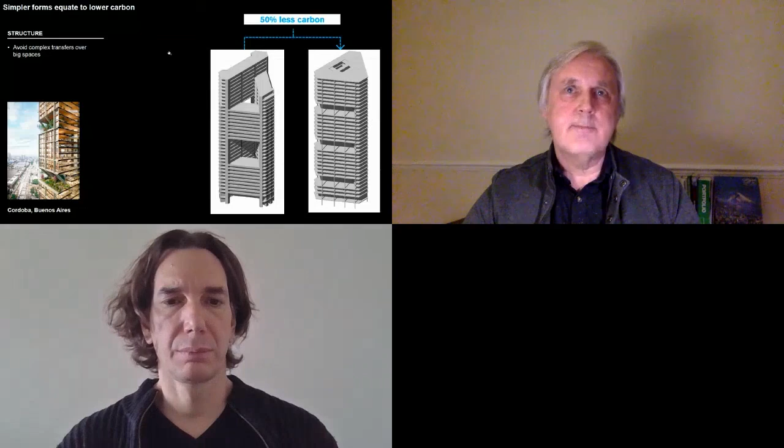And we looked very carefully also at all of the shading systems associated with the building, because we have found it's normally very good to have shading on a building to reduce the energy. But if the shading is too heavy, you can actually put back more carbon over the lifetime of a building than you can take away. So you have to make sure you do it properly. And Juan will talk about that in a minute.

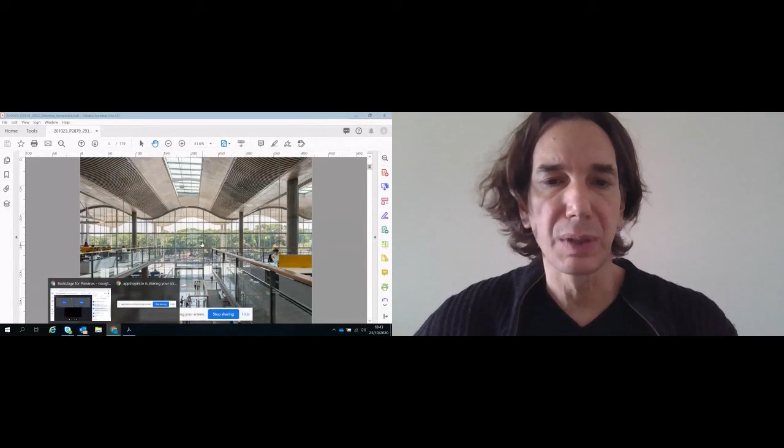This is the Avenida 9 de Julio, the center of our city. And this is the third project we do in the city. The first one, the Aleph, is a residential project. The second, City Hall, which is here shown on the screen, is one of the first civic buildings which we certified LEED Gold in Buenos Aires, and which was preceded by the Aleph, a residential building, which of course had many sustainable themes as well for housing, as shading the facade and adapting the buildings to climate.

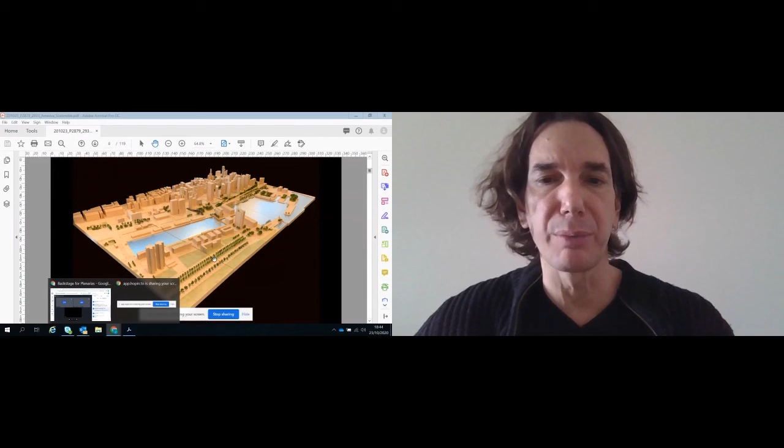What's very particular about this new project, which is a commercial office building, is it's located at the edge of the city, right on the waterfront. So it has fantastic views. And just to show you a bit of how we work, this is a model we made in our model shop of a large area of the city to study the massing of the building and how to best build a large tower onto this site.

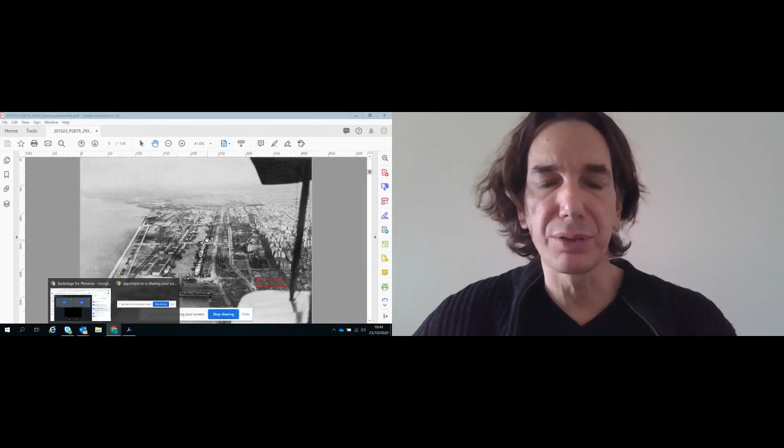It's a historic site. There you see at the center of the image, Puerto Madero, the Costanera Sur as well, which was a public area back in the 30s, and our site there in the red box, in a very historic fabric. And it's very central, as I was saying. It's very well served by public transport, and it's a very prominent location. So we thought it was a very special area to develop the building carefully.

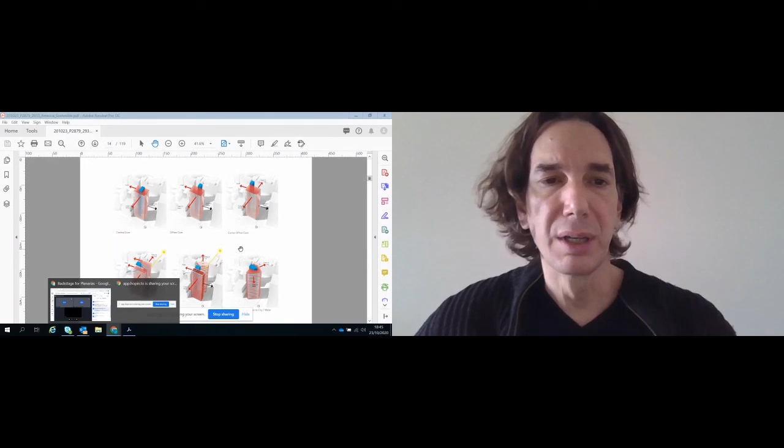So we gave a lot of thought on how to develop the massing. Usually we work with many iterations of building. So we started looking at a central core tower, then pushing the core towards the back to create more views, shifting it, opening up the floor plate and looking for the right massing.

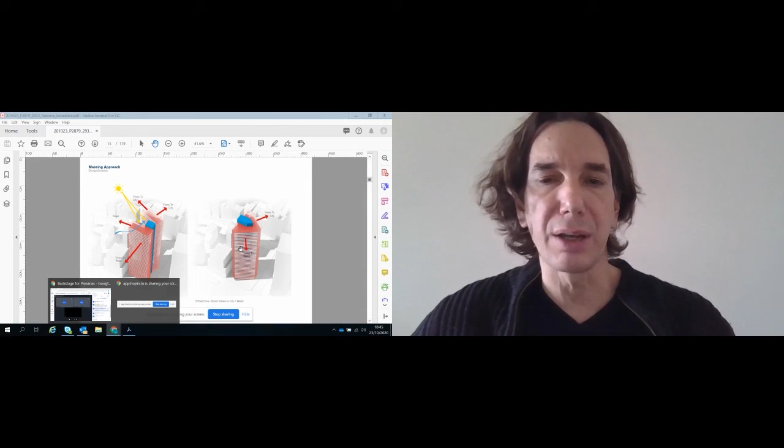And then we realized that because we have such a large bulky neighbor towards our north, we can use that neighbor to shape part of the building, but if we shape the building in a triangular form, we could get the best of the performance of the building and the views. This again is working with our team in London.

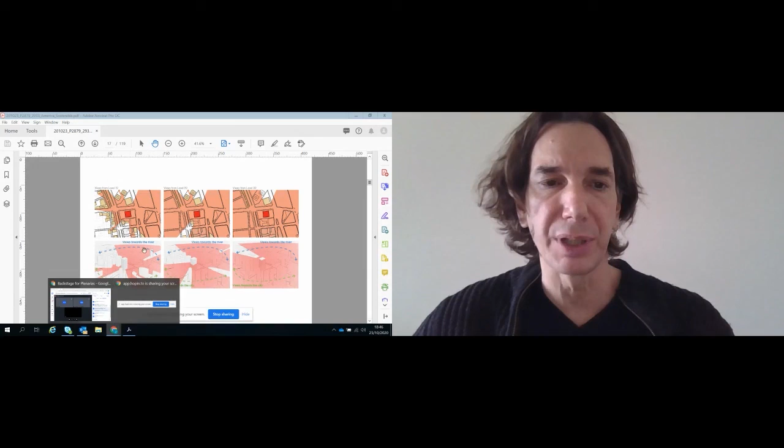We like working with very large models, all sorts of models, and all sorts of tools to understand better how the building and the shape performs. And from this view study is what created basically the shape, thinking of views as a fluid and actually flooding the site with views and seeing where the view wanted to go. So in these diagrams, you see that the shape of the building will generally follow the pink splash of views.

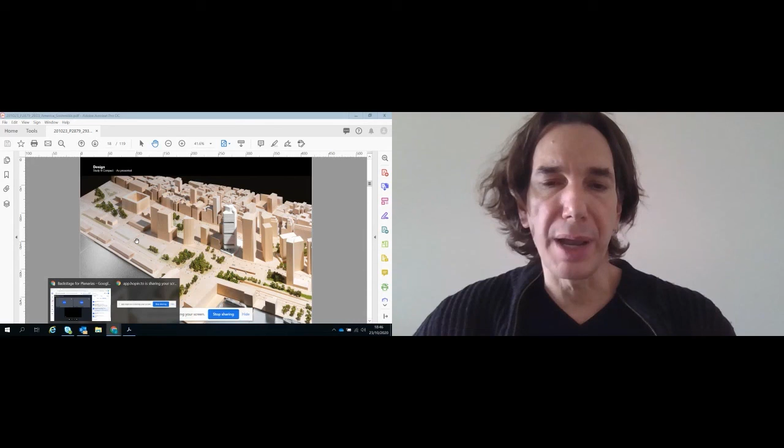And then in the model I showed you before, the form of the building, how it settles in, how the triangular shape maximizes the long view corridors towards the water and towards the city at the back. And from Puerto Madero, the Córdoba Avenue is almost on the axis of our site. So this gave us a very prominent tower.

One of the very fortunate things we were able to do is that we were granted an incentive by the city that if we freed up 70% of the land and created it as public land, we could get a higher tower. So we found the opportunity to make a fantastic urban garden and celebrate as well some of the aspects of the city. Buenos Aires is a very social city, lots of nightlife, lots of passion for tango, and lots of social interaction, which is limited a bit now by the COVID, but which we hope to recover very soon.

And to create this amazing lush garden: most of the civic piazzas that we've inherited from modernism are very dry landscapes. And on the contrary to that, what we wanted was to create a jungle, a very dense forest, to harbor what Chris was discussing before of actually sequestering and absorbing part of the carbon with a very dense canopy of trees and lawn areas, and to even raise the building above the ground so that the landscape could continue below the building.

And to have all this collection of our native species of Buenos Aires, the jacaranda tree, which is a beautiful tree, which is about to blossom now in November with its lilac flowers, the ceibo, which has pink flowers, and palm trees, which grow also very naturally in Buenos Aires, to create a very dense, lush forest, and a fantastic experience that as you approach the building, you actually walk through this very beautiful jungle.

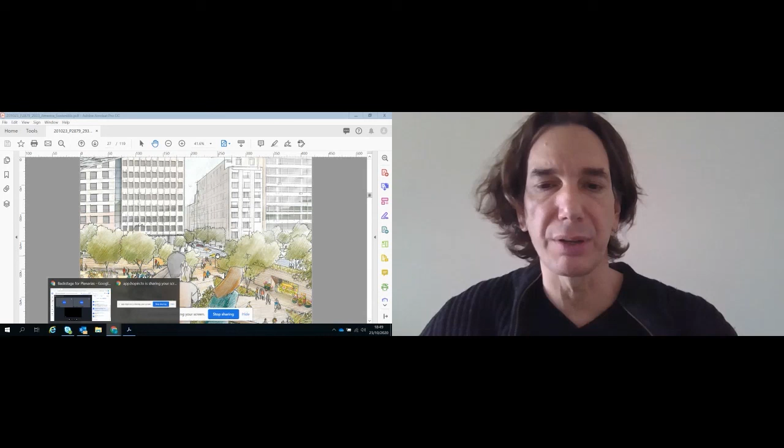And then the idea that you would go up through these escalators in the forest and continue your gardens up through the tower. So as you arrive to your lobby, instead of having the lobby on the ground floor, you actually come through escalators, through a promenade of steps and gardens to this elevated lobby, from which you can look back to the city and the gardens, and find spaces to be social, to have a coffee in the morning before you work, and create a very relaxed, contemporary workplace that would also blur the boundaries of the domestic and the corporate.

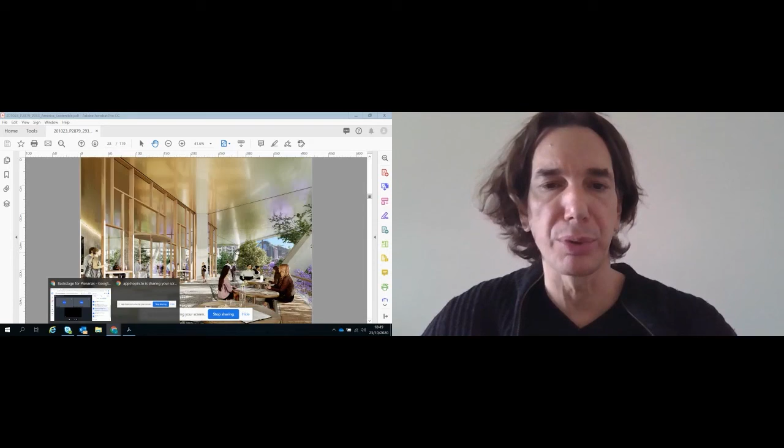This is the lobby. It's quite compact, but with the extension of the terraces and having linear gardens on the terraces that also have vegetation that cascades over the edge of the building, and developing this very natural palette of materials with wood, with leather, with paving stones, and with reinforced expressed concrete to create a very biophilic building which celebrates nature.

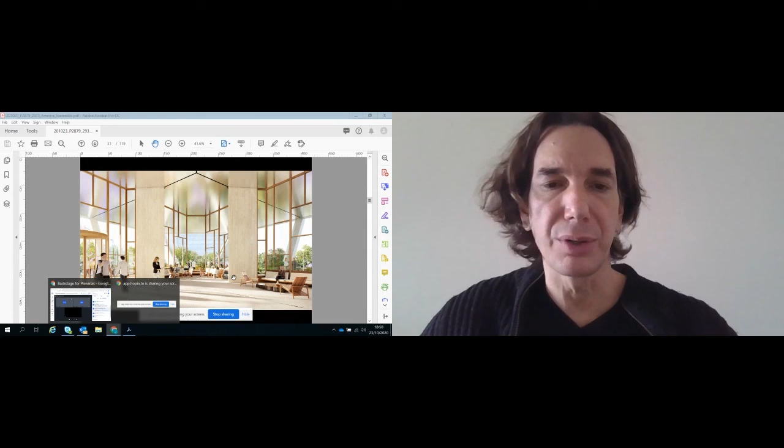This is the view from the lobby looking out, and the idea is that you're surrounded in an oasis of green, and all the noise that you have from the city, which is quite noisy, gets buffered as well to create this very unique, elegant, and fantastic experience for the building.

As we go up the section, another of the ideas was that we wanted to really have social spaces, and instead of having single small floor plates, creating these large atriums which go up the building, and a series of villages, in which we could also introduce nature within these courtyards. So we have 5 of these villages around the building, which is unprecedented for a commercial building.

And there, we have to congratulate our clients, who were also very forward thinking and accompanied us in this journey of creating one of the most forward-thinking office buildings, not only in Argentina, but we think in the world.

And as we developed this idea of having the green and terraces go up through the building so that we could green the whole building, then we found a lot of structural challenges on how to make the most efficient structure. So these are a number of different structural studies, how we could balance the amount of material and the structural performance to create these gardens.

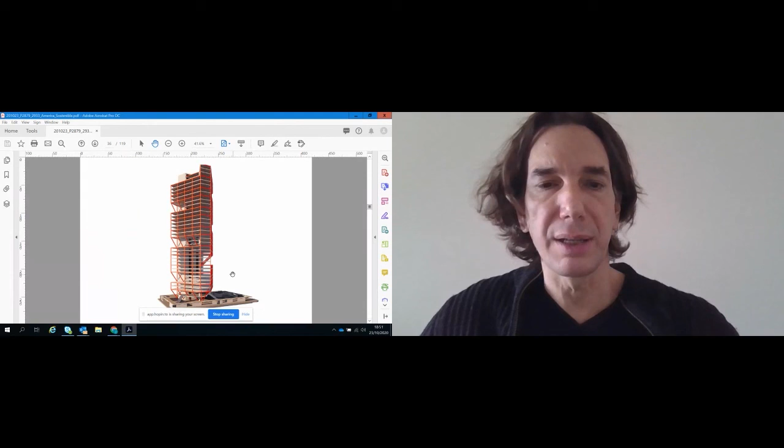And after a number of studies of the weight of the building and the structure, we found this solution, which with inclined concrete struts, we could create these very large openings in garden, but still have a very efficient structure to create these amazing gardens.

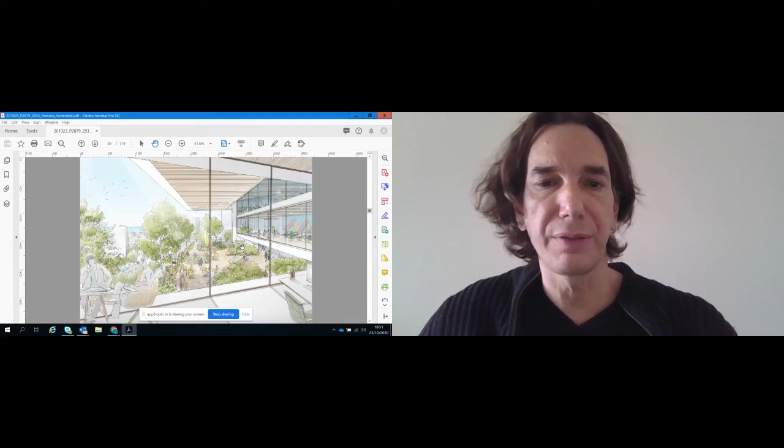So these are spaces which we conceive as not only spaces to work, but spaces to socialize. This is sort of our holistic view of how you see the workplace, which goes into the well-being and the philosophy of the WELL certification, that as you're working, you're surrounded by gardens on many of the levels of the building. And then these spaces are designed not only for work, for meetings, for relaxation, but also to have yoga classes, to have forums, to have teachings.

So this outdoor space becomes more important even than the indoor space. And here is one of our early images of how you would feel within this canopy of trees. We did also a number of wind tunnel studies, which were conducted in Australia, to verify that we had acceptable levels of comfort on the wind, because Buenos Aires is quite a windy city as you go up.

And then to have this image of the building where you have the gardens cascading down on each side of the triangular face of the building. So some of them face the city, some of them face the river, and as we segment the building, we also start integrating it with the different heights of the fabric of Buenos Aires.

These studies, as Chris was mentioning before, we were very conscious. Buenos Aires can get very hot. The sun is very aggressive, particularly in the west and in the summer. So we started with a baseline scenario: if we had 70% glass, what the operational carbon of the building would be. And then we started doing a number of iterations. Well, what happens when you start shading the glass? And of course, you reduce your operational carbon.

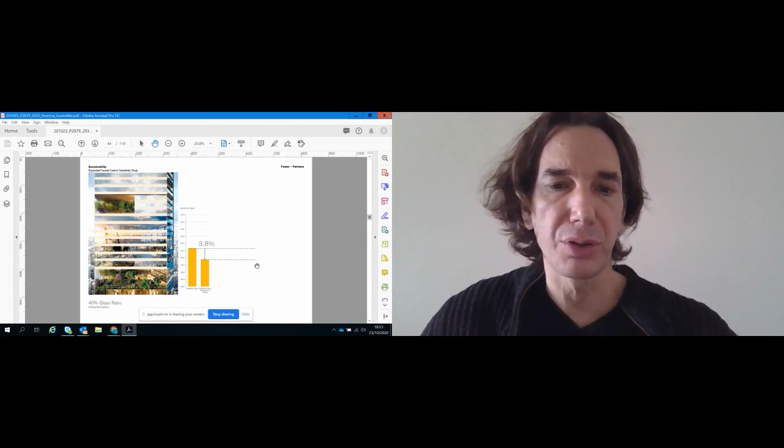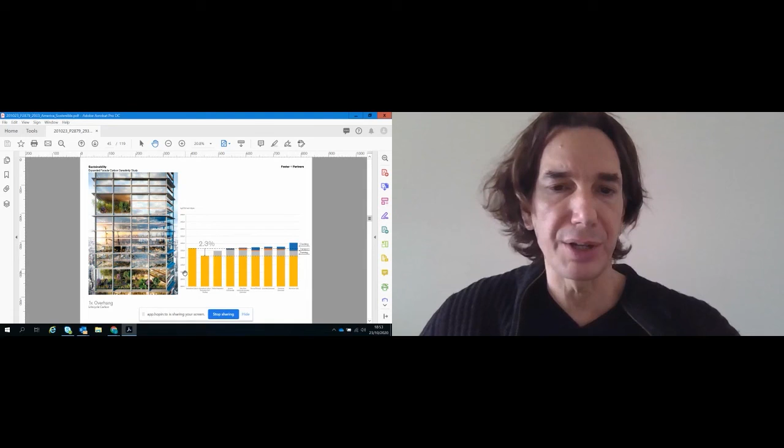And as you start adding different shading systems and different materials, if we did them in timber, if we did them in ceramics and glass, trying to find which of the materials actually would be the most efficient in terms of reducing this carbon liberation into the atmosphere. So we did a number of these, and as we did this, of course, we learned, as Chris mentioned, that we had to balance adding cladding material, adding aluminium, adding other materials, which helped us to reduce the sun on the facade, but added more in terms of materials and more weight onto the building.

So after doing a number of these studies, we learned that we had to find sort of an optimum balance between the amount of glass and the amount of shading and the amount of material, which was quite an enriching process for myself and for the team. And also always bearing in mind our sensibility to the aesthetic. So even though in this option we had very much shading and we reduced 6.1% on the baseline, the amount of material that we had to add for that almost offset part of the gains that we had.

So we ended up with 3 options, 3 studies which we presented to our clients. We costed them, we reduced that to 2, and the logic of this facade, of course, was if we can get the largest piece of glass commercially available, and the rest of the facade we actually make blank pieces of facade, then we had a huge gain in terms of reducing the glazed area of the building. So our average solar radiation reduced a lot.

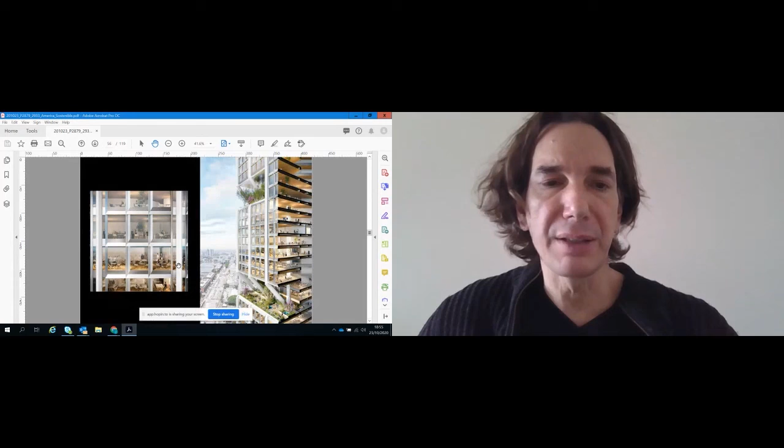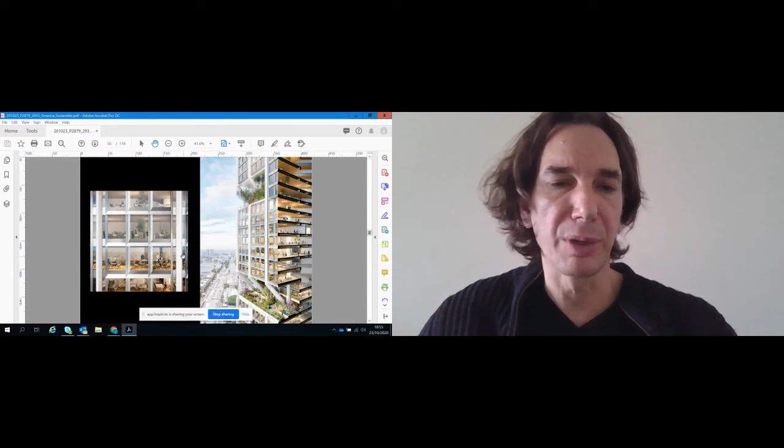So instead of having a curtain wall building, we found that, even though the views were very valuable, we could still have amazing views with less glass. And if we folded the metal to provide a lot of the shading at the high point of the sun, then we had the optimal solution in terms of carbon reduction and footprint reduction and views.

So this is the solution that we currently have, which is a picture frame, which is saying if we move away from curtain wall buildings and we look at the surroundings where traditional buildings had less glass, but still we have amazing framed views, we have huge daylight penetration, but we can reduce part of the effect of the weather by shading part of the facade.

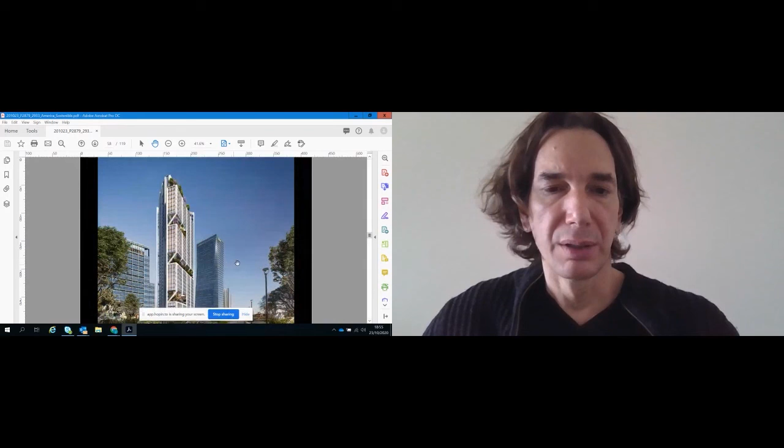I'm going to fly now to Chile, to La Fábrica. This is a project that we started about 9 months ago. It's our first project in Chile. Santiago is also a city that is evolving, in a number of development patterns on the basis of the automobile. And this is what names our project, La Fábrica, which actually is a factory. It's in a very industrial neighborhood, San Joaquin.

And this was a building built in the 1940s, which was the main manufacturer of silk and cotton in Chile. So it was a very important factory. And it has a very rich social history and political history, because at one point it was actually taken by the workers, then it was reclaimed. But there was always a vision from the owners to provide a social center. They provided housing for the workers. They provided school, nursery. So it was a very forward-thinking place.

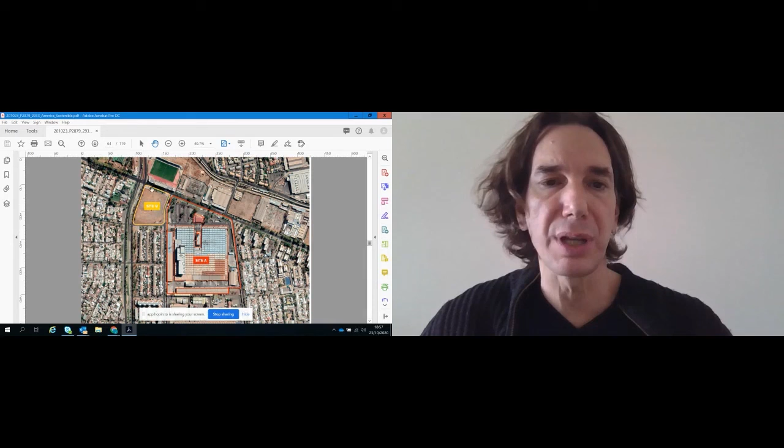And along the site, all the housing was workers' housing, in which a lot of the families of the original workers of the factory still live. So a very beautiful project in terms of the architecture, but also in terms of the social history and the social implications that it has. So our commission was to do a master plan for the site A, that's shown there in red, and to do 600 units of housing associated to the factory in the site B.

And I ask you to look here. I don't know if you can see my cursor, but towards the right and center, you see a blue swimming pool and 2 large towers. This is the pattern of development and housing that has become predominant in Santiago. And you see it here in the background of the image again, these very tall towers which reach the ground.

And one of the missions that we put onto ourselves is that we wanted to change this pattern of development. We do not want to build tall. We do not want to build far away from the ground. And we asked our client to follow us in having lower buildings, buildings which would create green spaces, and which have a more dense urbanism.

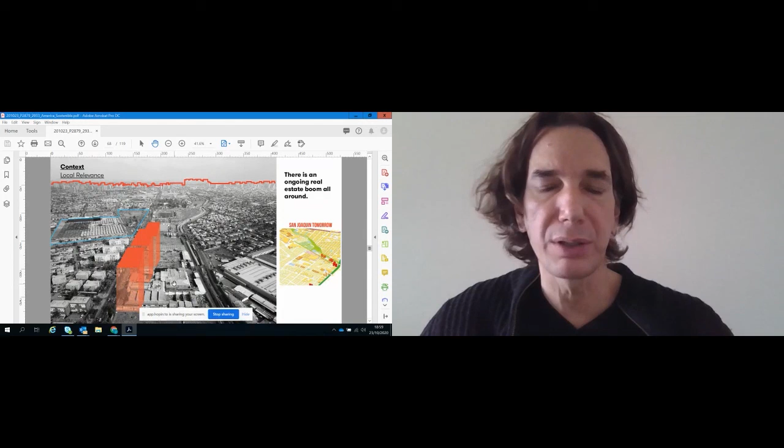This is the Fábrica now. You can see it has these large spaces surrounding it in the front, which are surface parking lots, and currently it's a retail outlet. Part of our brief was to enhance this retail. And again, from another angle, you see the future development, how the planning only considers very tall buildings with a very poor relationship to the ground.

So our first recommendation: we love the existing building. It was a very avant-garde deep plan building, 200 meters deep by 200 wide. The concrete shells, which are from the 1940s, were a very forward-thinking technology at the time. And of course, this profile was related to bringing natural daylight. So we would even say that this building was a sustainable building, even in its conception.

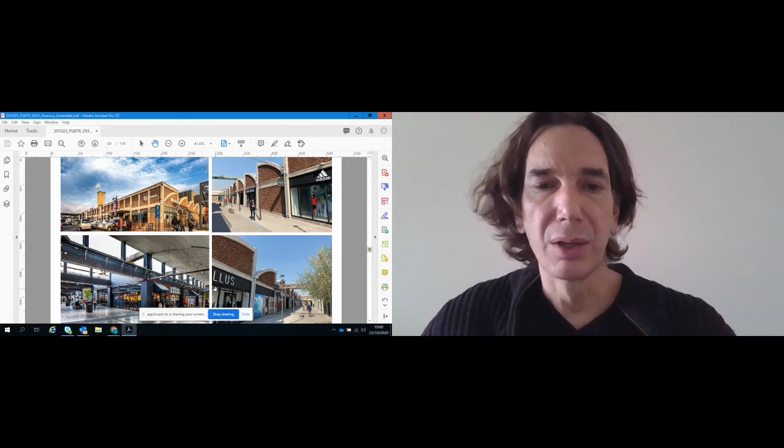So we argued very strongly that the building had to be kept, and that of course there's a value in keeping buildings. Instead of demolishing, we also save carbon by refunctionalizing and improving existing structures. Whereas in the models of development I was showing you before, the model is to demolish all of the existing and create new buildings. But again, the social fabric, keeping the memory of the buildings, keeping the livelihood of the neighborhood, avoiding gentrification. These are the workers' housing on the perimeter. It's very sensible socially.

People with their gardens, their relationships to the floor, their small commerces, which they put on the front porches. So we wanted to celebrate that, to enhance it. We wanted people to remain on the site. And how could you do an architecture that was sympathetic to this feeling, that would make people love their neighborhoods and not want to leave?

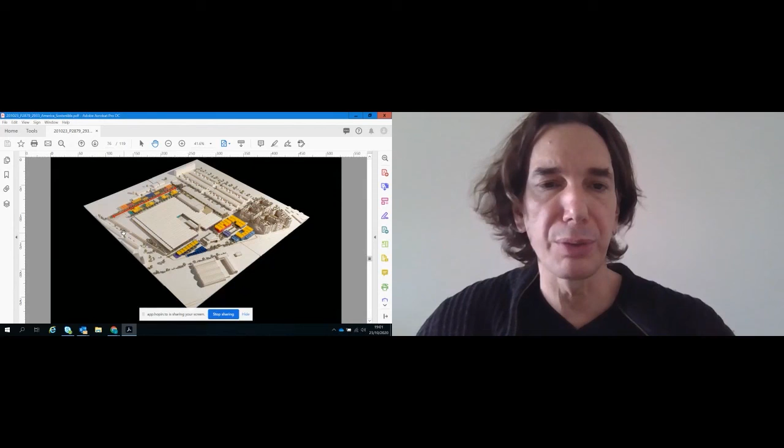So as I go now to site A, and this is how we developed the master plan, we decided to split the large block into smaller blocks, and to have low buildings in terms of six floors, to densify all of the edges of the building with housing and offices, creating a mixed-use district, creating a South Boulevard, removing only the bits of the factory which were not from the original building to create space, densifying the back to create a destination, and densifying the edges with food and beverages, retail, housing and offices.

And then to actually create access, reconnecting all of the existing neighborhood, the new housing, and the back where you would have, again, more housing. And by only removing a center of the factory, to actually create a wonderful access, keeping at the center the clock tower, which is an original clock tower, a marker that identifies the place, bringing it into the design, and then moving through to the South Boulevard,

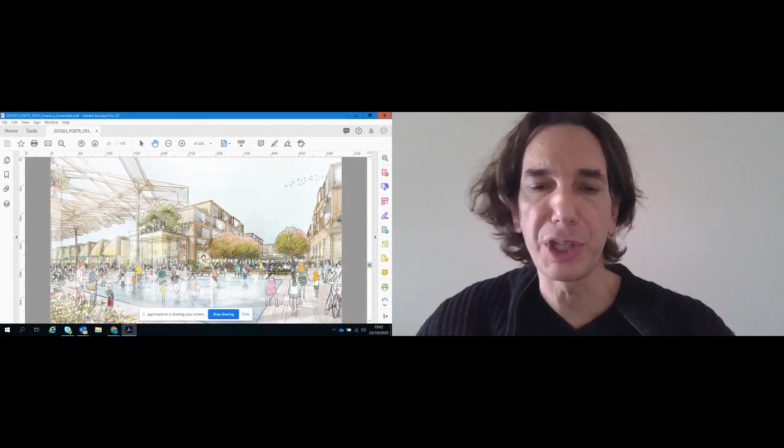where you have this very vibrant mixed-use district with residential, entertainment, and it becomes an enrichment, a destination for the new residents, but also for the existing residents, and to try to push forward this vision of a green city. I'm going to quickly pass through then site B, our ideas for the residences. This, of course, is on the drawing board, is work in progress.

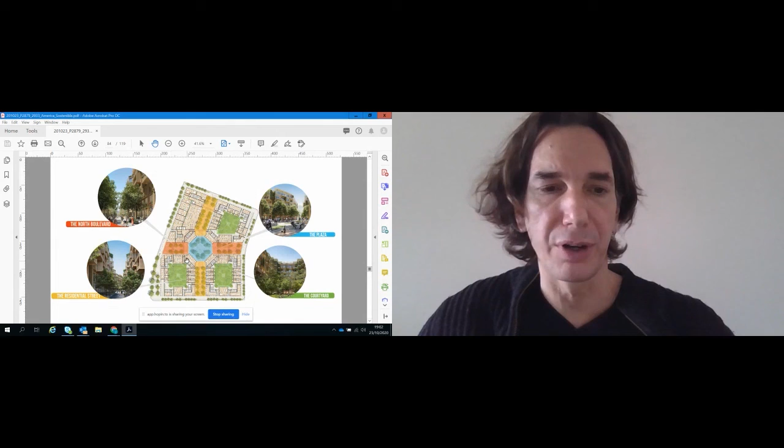And again, we conceive the city as the social spaces of the city. So we split into 4 blocks with what we call the North Boulevard with retail, the residential streets. This is our North Boulevard. We come to our central piazza, which is a very civic space. Even though it's private land, it will be offered to the public as a publicly accessible street. The development of the blocks had at the heart green courtyards again, to add more vegetation, to absorb more carbon with our trees. And these very beautiful rich courtyards, as in our previous project, we're always trying to have as much dense vegetation as we can.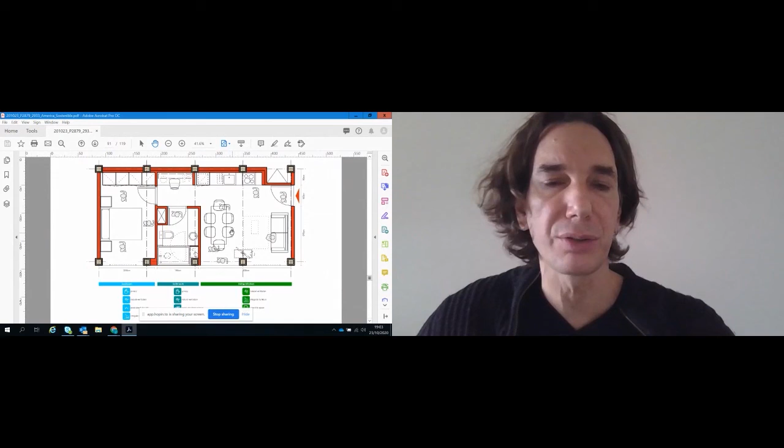The units are very small units. They're for middle class, low income families, young families, new families. So there's also a social agenda to embrace all sorts of new families, not traditional families, but a very compact space with very good quality spaces, good daylighting, and an access which resolves the service at the back and the kitchens and all the wet spaces. And then the ground floor is very important for us. We see a tapestry of small retail, only very few opportunities for big retail, to keep the livelihood of the neighborhood with small retail.

And then just to finish, we're again trying a very ambitious idea, which is to celebrate wood. Steel, we say, is the 19th century material, concrete the 20th century material. But if we can make wood the predominant material of the 21st century, wood is a storehouse for carbon. And in Chile, we saw an opportunity. 25% of Chile, especially the south, is covered with wood. Lots of it is naturally regenerated, but there are very global players in terms of the wood market. And Chile is a very forward-thinking country, a very avant-garde mentality. And we thought there's an opportunity to celebrate also a tradition in wood.

These are the churches of the south of Chile. Not only is the cladding made in wood, but the whole buildings are entirely built in wood. The floors, the furniture, the ceilings, the structure. We went and visited some of the CLT plants, and we thought, well, we have a real opportunity to make an impact in carbon by looking at a structure in wood and actually promoting a new pattern of development, but also a new pattern of construction, so that maybe we can help push forward the agenda in making mass timber buildings the mainstream of construction. We kept the buildings low for that.

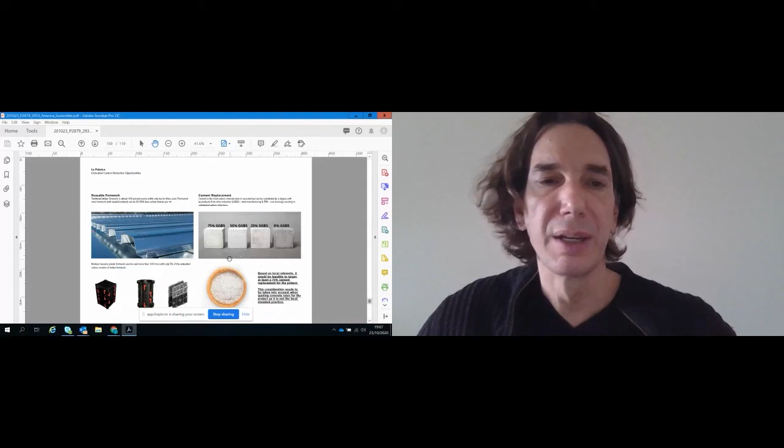And of course, looking at if we use GGBS, cement replacement, reusable formwork, basically all the tricks we can find, recycled content, low carbon sourcing by using power from solar. We analyze with Chris's teams all of these opportunities and we try to promote them.

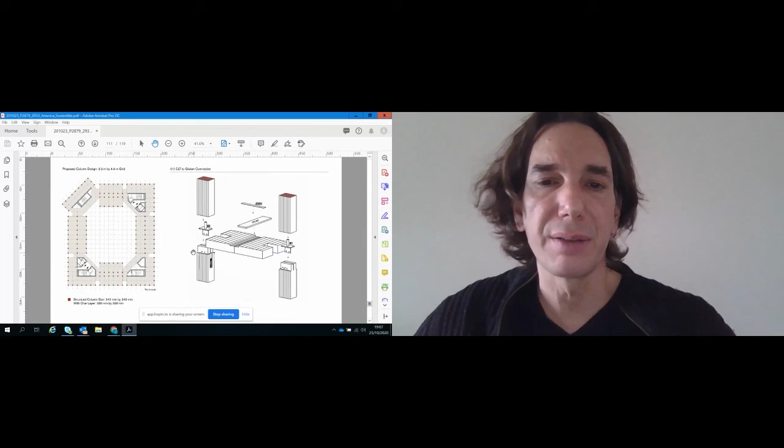So this is the structure as it stands now, a very tight grid. So we have to optimize the cross-laminated timber floor slabs, a grid of columns at 2.2 by 4.4 with concealed connections, which are then protected by the wood. And what are the spatial implications? Again, working with models is what we like to do. And the most effective option, having a mass timber structure with no beams for service transfers.

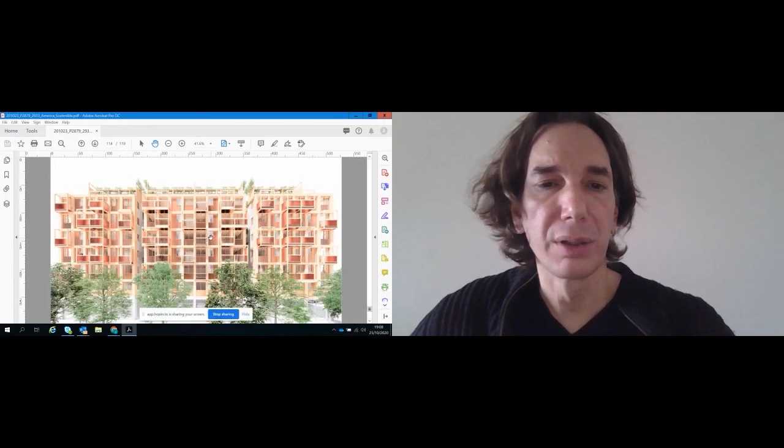The facade as it looks now, and then again, it's an ongoing discussion of how you deal with fire in buildings. Of course, in a mass timber building it is a sensitive analysis. And we're working with fire engineers, both our internal engineers at Foster's and our Chilean counterparts in Chile, to try to deliver this vision where we can provide a safe and beautiful building, a sustainable building in mass timber.

Ideally, we will have this unencapsulated, leaving the timber exposed, or we might find that partially we have to encapsulate it, or even if we need to fully encapsulate it, it would still be a very sustainable building because we're moving away from building in reinforced concrete.

So to finish, the vision, Santiago, the Andes, the Cordillera de la Costa, and the sunset, we want to create this very vibrant, sustainable community for a very vibrant future.